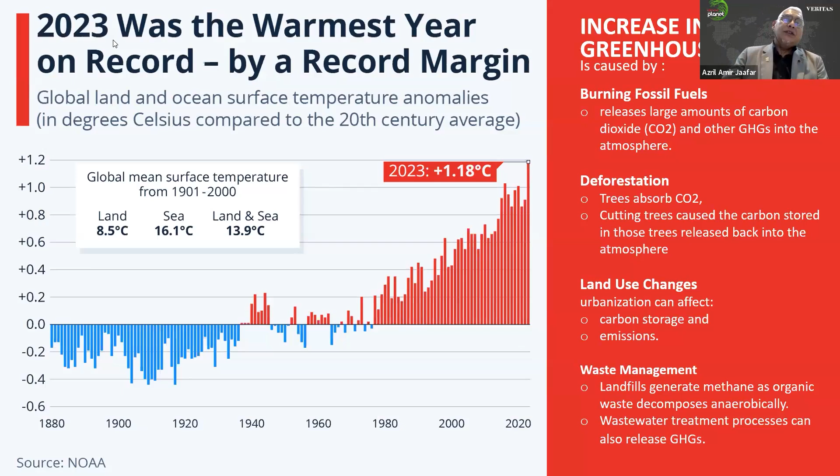And we architects actually are one of the reasons for global warming. 40% of the carbon emission in the world is actually caused by the building industry, and it is from new construction as well as building operations.

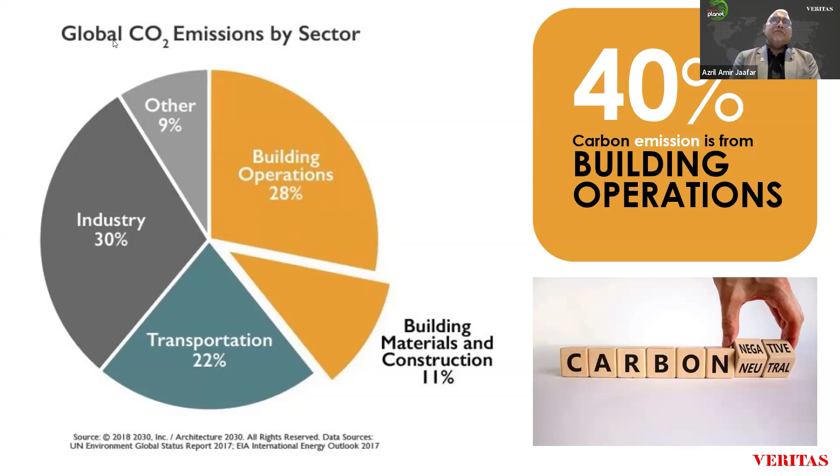And when you look at other parts affected by our doing as well, the transportation - because we indirectly cause the urban design that affects transportation - transportation causes another 22%.

What sort of strategies can we as architects adopt? This is some of the ideas I would like to share that are being used in our practice, but mainly the ideas are for tropical countries. As you know, we are practicing in Malaysia mainly, and most of our projects are in Malaysia.

The issue with tropical countries like Malaysia is how to cool the building, and air conditioning takes about 56% of the energy usage in building operation. So in designing the building, we have to adopt strategies: first, we have to create energy efficient design through various measures as listed here, and at the same time, the building must be able to generate its own energy through various measures of renewable energy.

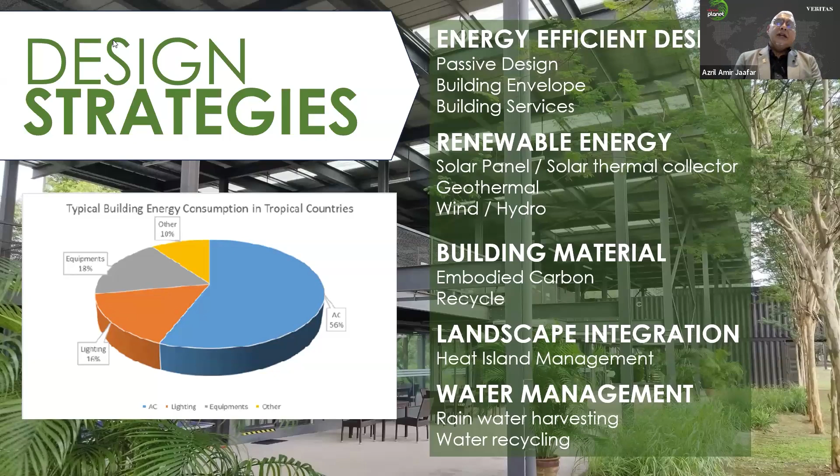And the material used for construction must be looked into from the aspect of embodied carbon and recyclability. Of course, you can't design a building in isolation. You have to integrate and optimize it, trying to capitalize on the surrounding landscape and how you integrate with it. Last but not least, water management is one of the resources that affects building operation. Let's go into examples of our project.

The first example focuses on how we reduce the heat island effect in the city caused by building design. The project is in Shah Alam, one of the cities in Malaysia. It is the headquarters of one of the property developers in Malaysia, and we call it Laman PKNS.

Laman in Malay means a compound, part of the surrounding of the buildings. The building is seen as an extension of the park because it is located next to a public park.

This is a bit of context of the building. As I mentioned, it is in the city, but the city has a large public park, and it is at the periphery of the central business district and the park. So how can buildings facilitate this? The big challenge is how the building can facilitate the integration.

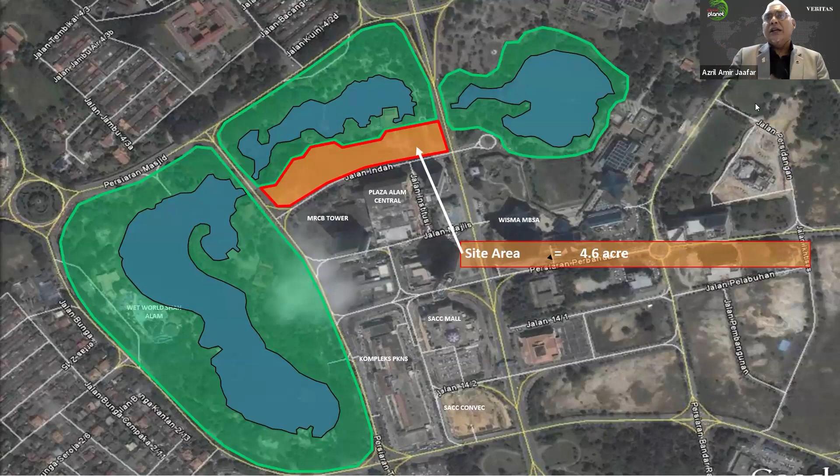These are the concepts we adopt: facilitation of connection from the city to the park, connecting and facilitating connection among the people, the users of the building, and more importantly, connecting with nature.

First, as I mentioned in the strategies earlier, it's about passive design strategy. We look at orientation, and in the tropical equatorial location where this building is situated, we have the north and south facade. The long facade of the building must avoid east and west.

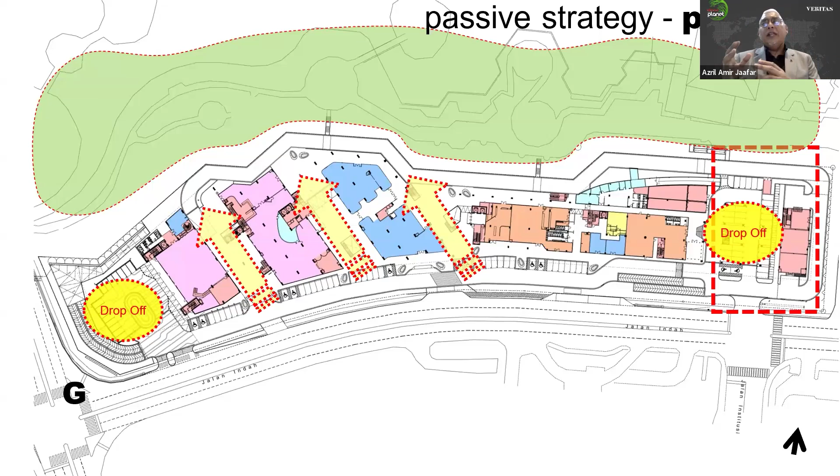So in this orientation, the long facade faces north and south. Then there's the planning - how do you reduce the air conditioning space? The concept we use is to only air-condition the working spaces, the offices, whereas the circulation spaces are left naturally ventilated.

This is an example of that. And then vertically, in the section of the building, we arrange the spaces inside to help insulate the building itself.

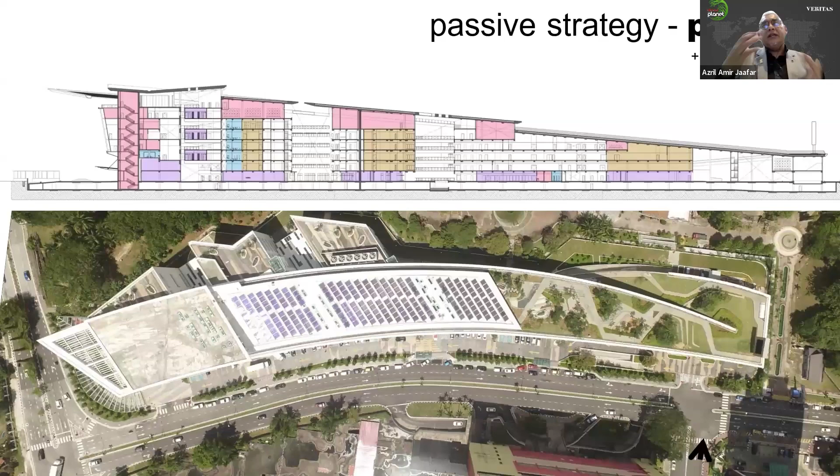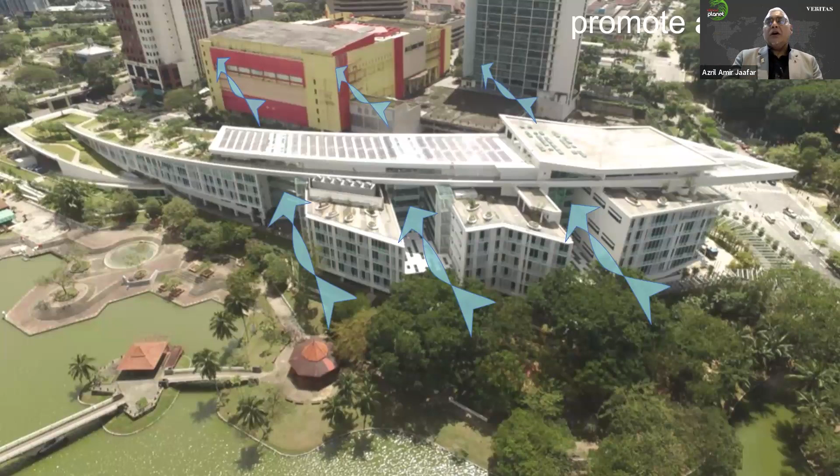The building is kind of a large block, but in order to increase the energy performance and passive cooling of the building, we break it into 4 blocks that allow air to flow in between them, creating a wind tunnel effect that passively cools the building.

This is how the building looks from the street. The spaces between the blocks create a nice shaded external environment that can be used for many purposes - this is the idea of flexibility and adaptability of spaces, which will be demanded more in the future.

This is the western facade, where we use a large overhang to shade the building, which at the same time becomes a feature of the building.

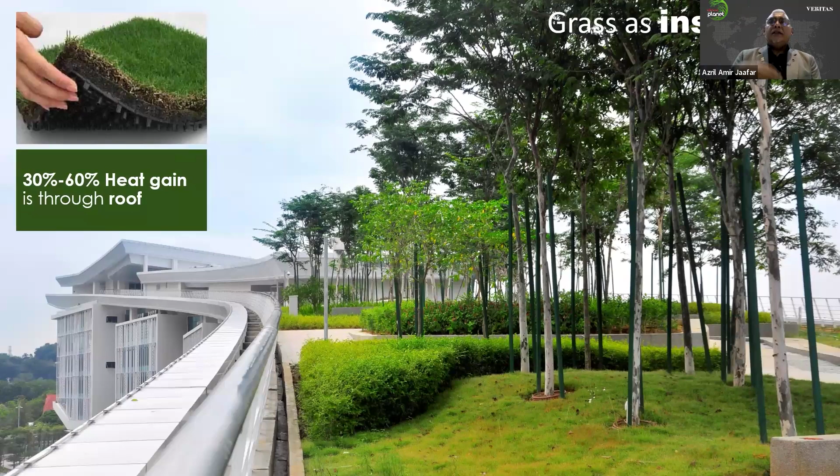The big idea of the building is reducing the heat island effect, and we use landscape, the roof garden, as the main feature that insulates the building from the roof. Of course, we also need a high performance facade and envelope to minimize heat transmission from the surroundings.

We also considered lighting strategy and natural ventilation features in various spaces. Another important element is renewable energy features. This building was designed in 2009, when photovoltaic technology was fairly expensive and solar panels were not as good as nowadays.

So we adopted a renewable measure using the heat tube. In simple terms, we harvest the heat to run the air conditioning system - this is one form of renewable energy we adopted in this building.

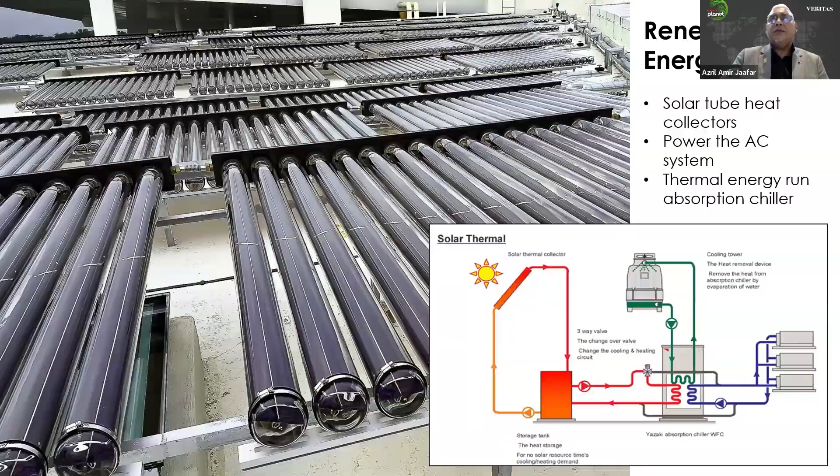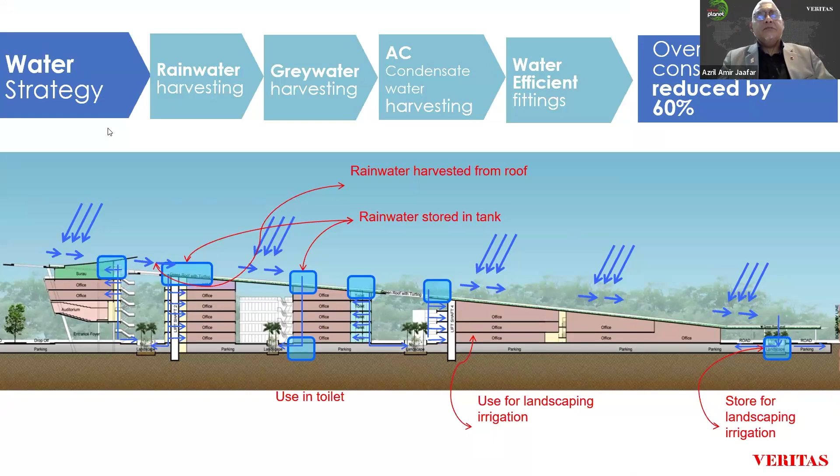Regarding water, various water saving measures were adopted, including rainwater harvesting and other features along the way. Overall, consumption of water from the public main was reduced by 60%, and the building offsets about 5,000 tons of CO2.

These are the verticals we normally use to measure building consumption, or to check the elements that will cause or reduce energy consumption in our design.

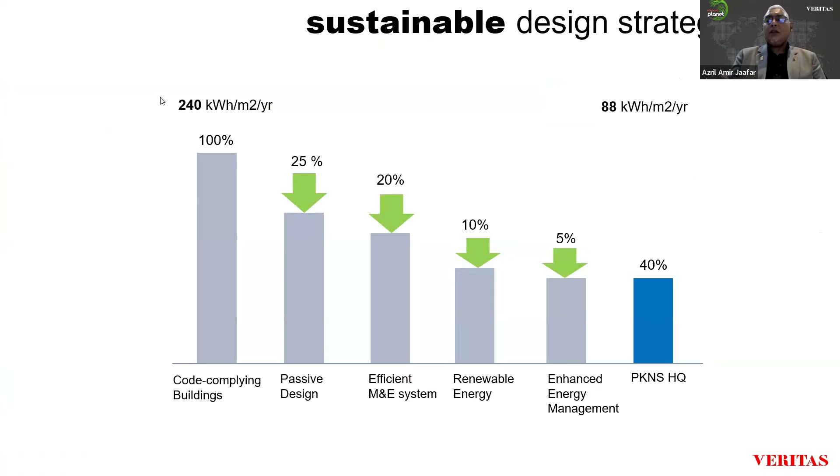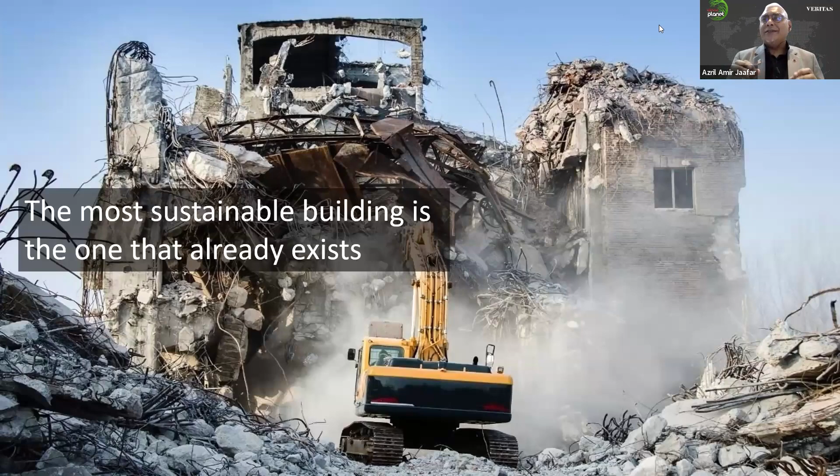Okay, the next project that I will show is centered around the recycling of buildings. This is another one of my favorite quotes: the most sustainable building is the one that already exists. Try to save the building as much as possible without destroying it, because once you destroy the building, more CO2 will be released to the environment.

Another aspect is the urban design, the historical and contextual aspect of the city. So when you recycle, we preserve the history, the memory, and the identity of a place, and at the same time, of course, minimize the carbon emission.

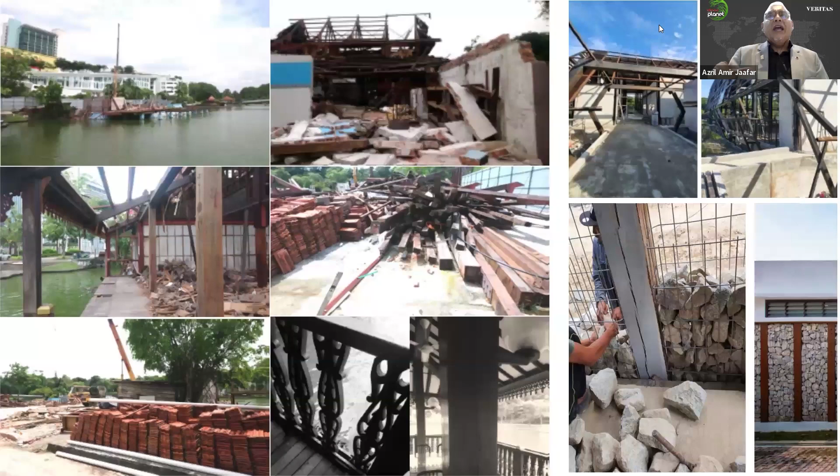It is a floating restaurant, a very small building, again in Shah Alam. The problem with the building is it is suffering from lack of maintenance. The building is dilapidated, left to rot, and because of that it was in danger of being demolished. What we did is we managed to convince the authority, the owner of the building, to maintain it at the same location.

And recycle whenever we can the material being used in the construction of the building. First of all, the foundation of the building is being maintained, and whatever materials we can salvage are being kept and saved, and we remodel the form, reuse it in different usage or configuration or permutation.

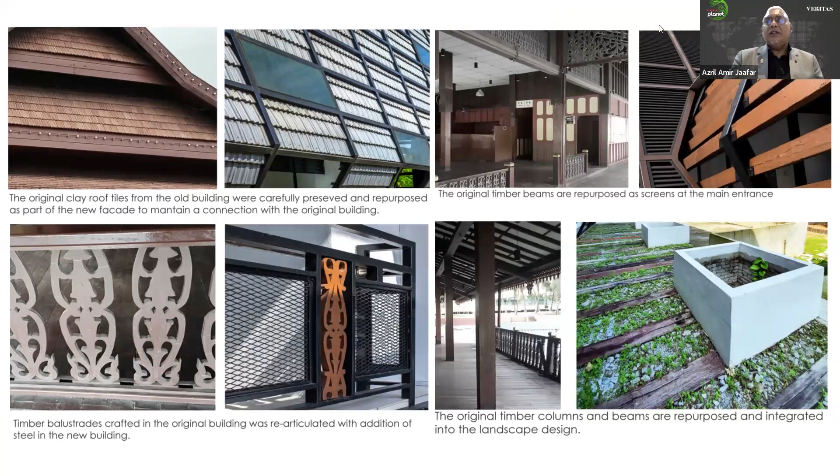So, for example, the roof tiles being converted to the facade of the building, and some of the nice articulation of the craftsmanship being recycled and reused, so that a certain element of culture is being preserved in the building itself. And we reinterpret the identity, the cultural identity.

If you look at the previous building, the form was some version of vernacular Malay architecture. In the new building, we look at another reference of the traditional or local identity itself in a modern form. It is about reinterpretation, about redefining the identity of the location that responds to the climate.

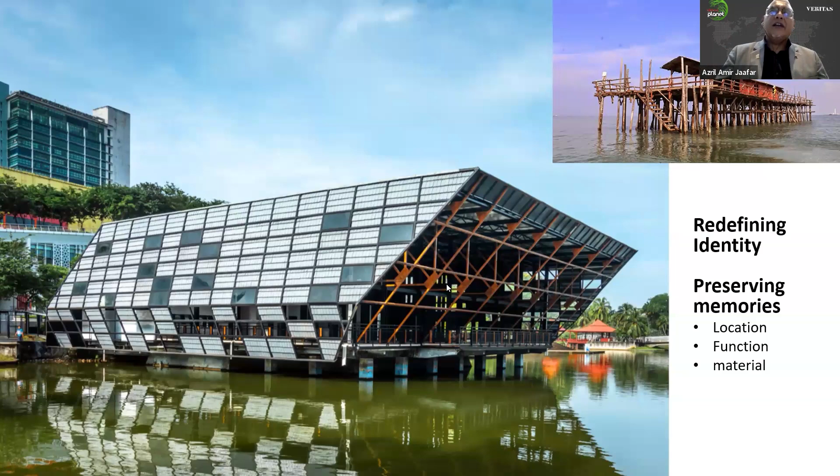Right, hang on, let me try. Okay, the next project is about urban design, slightly about urban design.

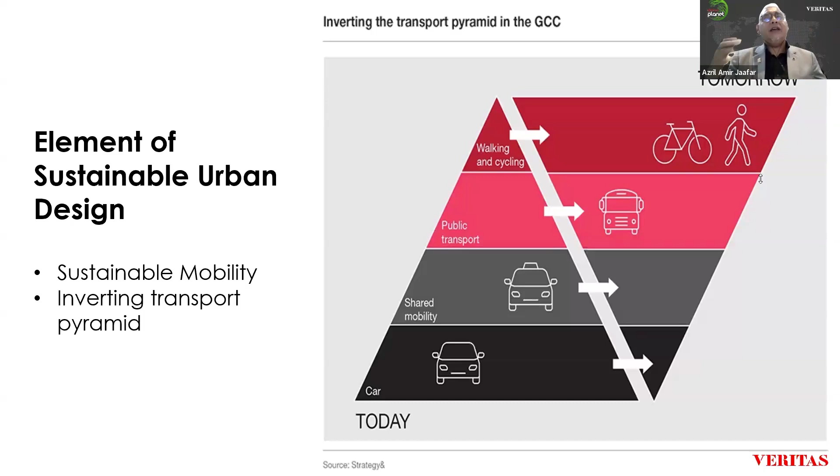The trend in the future that we can't avoid is moving towards sustainable mobility. This diagram is something I got from a Middle East conference, where the objective of mobility in the GCC countries is moving more towards walking and cycling, using public transportation, using shared mobility, as well as reducing private car usage. These are the main directions of urban design in the future as far as sustainable urban mobility is concerned.

The project I'm going to show next is about facilitating the movement of people between two different districts in Kuala Lumpur. If you are familiar with Kuala Lumpur, there is one district that has a very distinct skyline, the Kuala Lumpur City Center, and across the river there's another really undeveloped part of the city. There's a lot of history, but I won't dwell on the historical part in this presentation.

But basically, for today's topic this is about facilitating urban mobility, about encouraging people to walk in the hot tropical climate, and at the same time providing equal opportunity for development as well as addressing the historical part of the project.

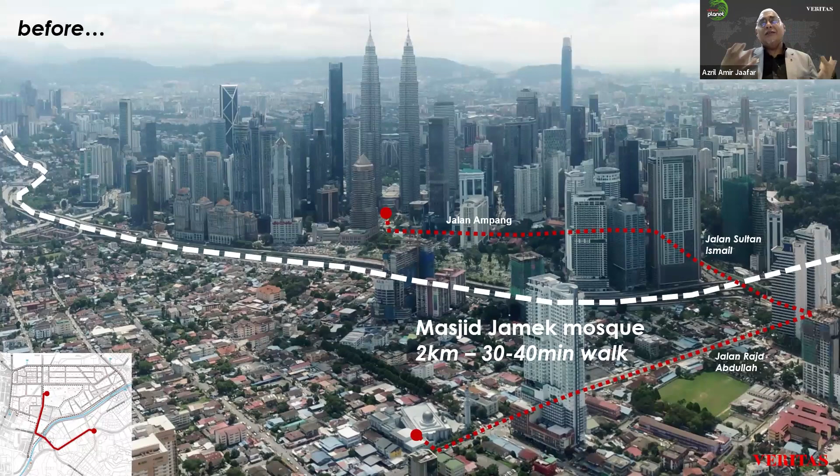A bit of the issue here is that highways disconnect the two parts of the city. Because the highway was constructed dissecting this part of the city, walking became impossible. The bridge that used to be there is no longer there. In order to go to the other side of the city on foot, it would take about 40 minutes in the hot tropical climate, so people definitely won't walk in that kind of situation. But with the bridge, the total distance or time for walking is reduced to 15 minutes.

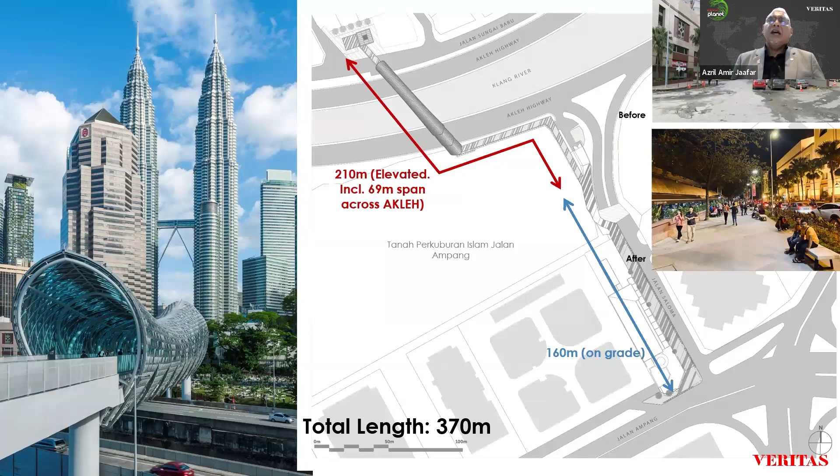When we develop the design, because it has to be an attraction in the city, we look at the elements of culture, the elements of environment, and at the same time the elements of celebration.

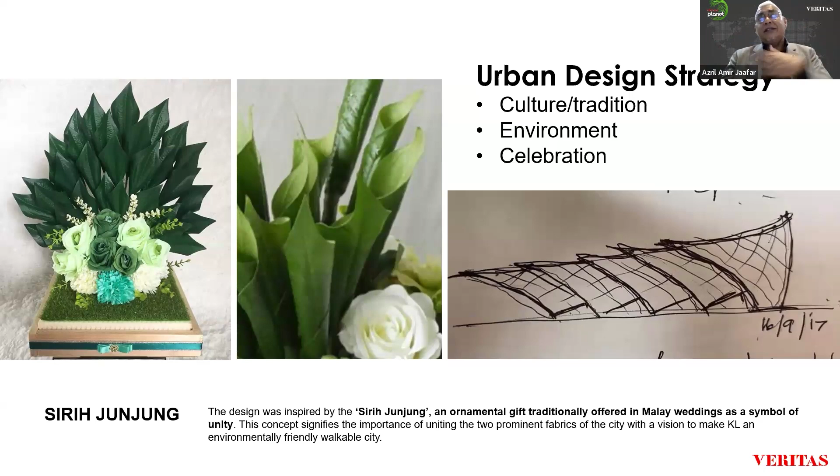And because of that kind of attraction, people are encouraged to walk. And this is one way of encouraging urban mobility, sustainable urban mobility in the city of Kuala Lumpur.

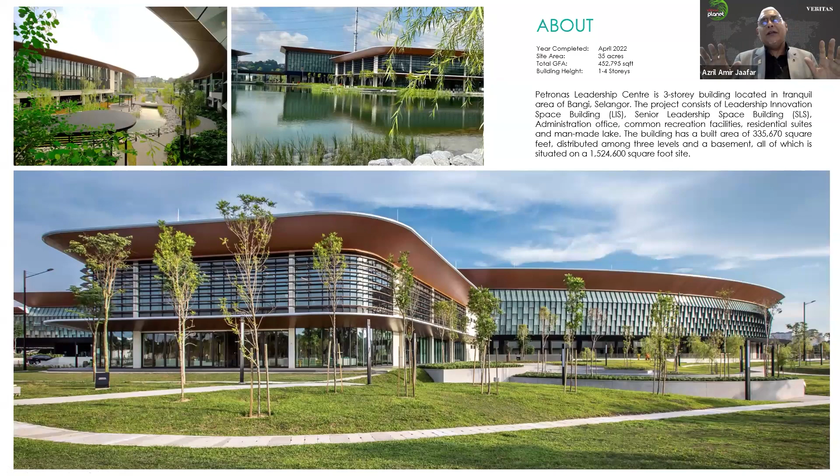The project is on a 35-acre site, and as you can see, this is a sprawling building. So our adoption of the project is slightly different, and the project is looking at the future of learning. So the elements of flexibility and innovative technology are married and integrated in the overall design, but at the same time the method of interaction and learning is through dialogue, interaction, collaboration. This is the challenge: how architects can foster all this effect through spatial design.

And the most important part is how we incorporate environmental design into the project. So we set the objective of having zero energy consumption, zero waste, as well as minimal potable water usage. These were the objectives we set at the very beginning of the project.

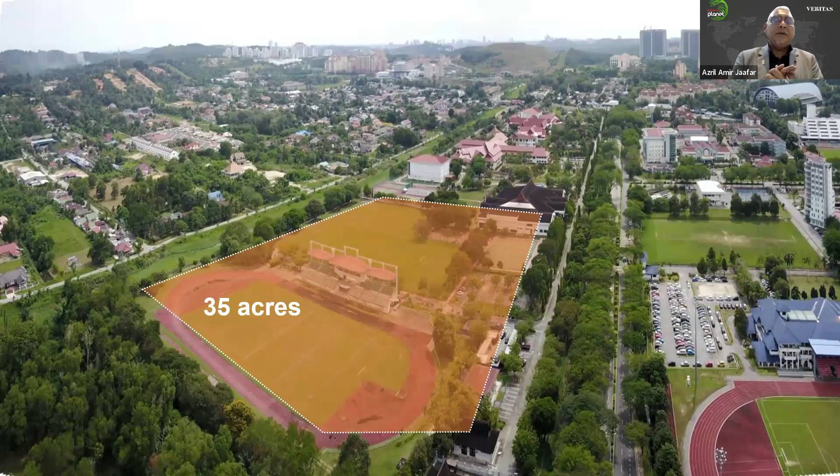As I mentioned, the site is 35 acres, and it had been touched before, developed as a sports complex, then abandoned and not used because of safety issues and lack of maintenance again. So what we did here...

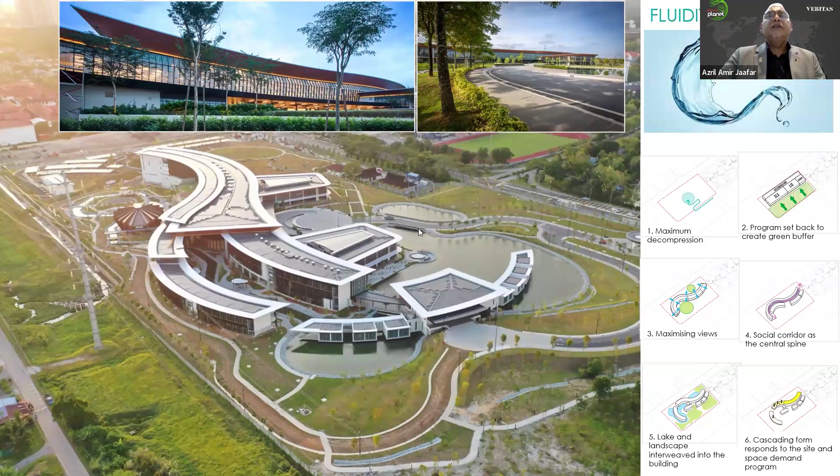First of all, the concept of fluidity creates the form of the building, and there's some environmental advantage as well. Because of the sprawling site, we looked at vernacular architecture and vernacular urban design, the village design actually, to see how we could use the surroundings to create a conducive microclimate that lowers the temperature around the building. Because once the temperature is lowered, the effort to cool the building is less. So this is the approach for this project.

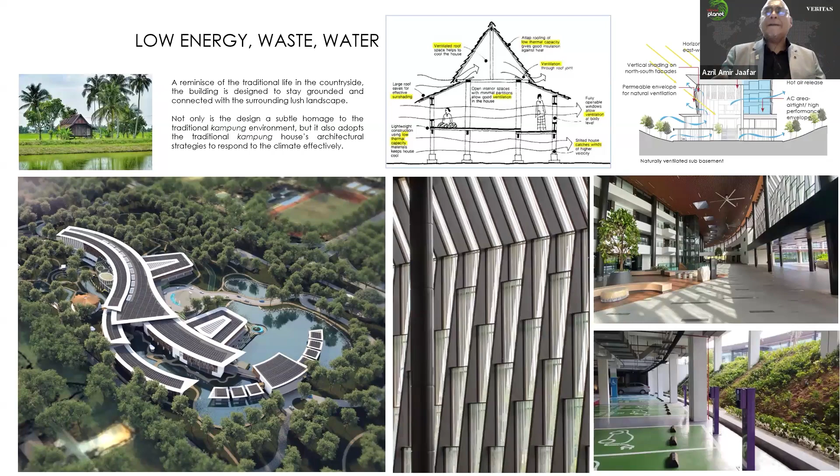And again, the same concept of orientation and the various ways of locating materials and spaces inside the building, as well as integration of naturally ventilated spaces in the large complex, is being adopted here.

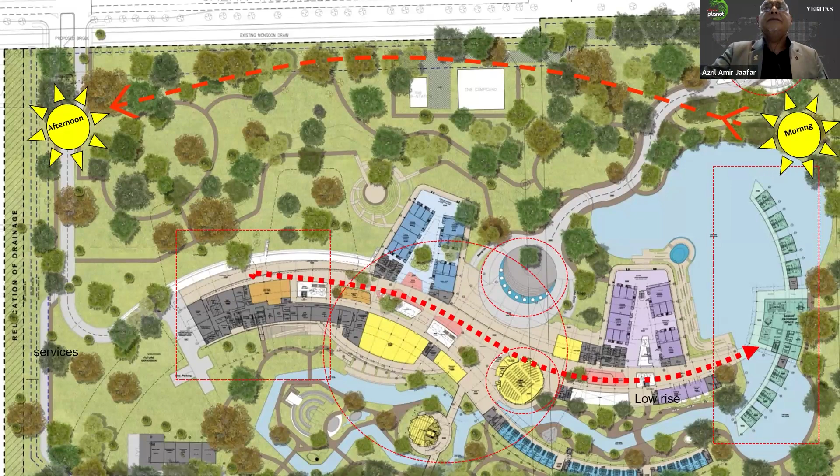And the elements of flexibility, because flexibility is one of the features of future spaces, so the classrooms and teaching spaces are designed so they can be adapted into various forms, from a 10-pax module to a 30-pax module, to 20, to 60, and even 120, through various configurations using architectural elements.

One of the features of the building is the multi-purpose hall, which is, first of all, round, and at the same time integrated with technology. The idea is for the space to give the experience of being at another location. So this room is fitted with LED panels surrounding it, so that the whole experience is really immersive inside the space.

At the same time, one feature here is that the LED panels surrounding this space on the wall are made of rotatable panels. So at the end of every event, each of the panels can be rotated so that you are transported back, or reminded, of your actual context, the current location of the building.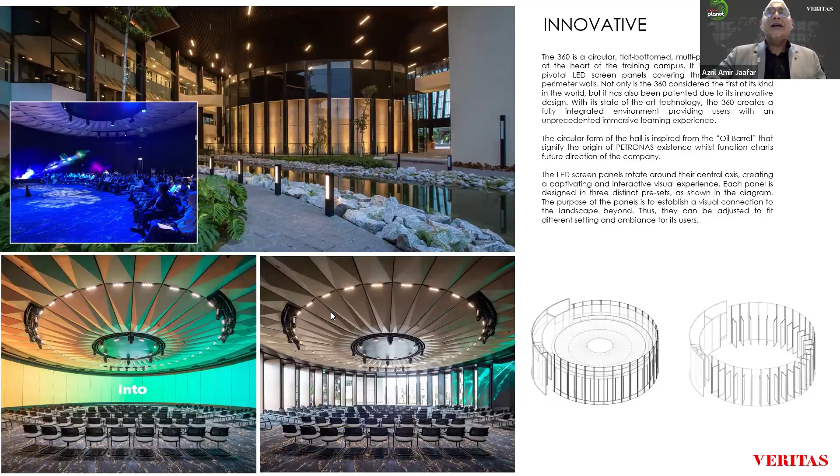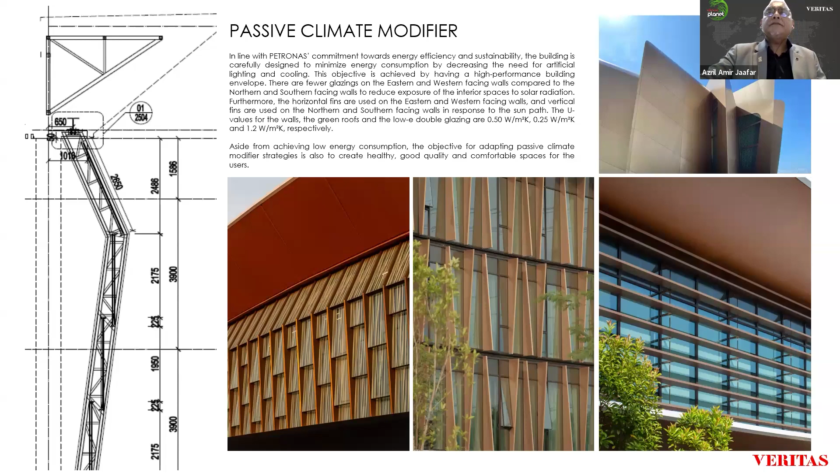How do we adopt various elements on the facade to create high performance as far as heat transmission is concerned? Our method is simple: on the east and west facade, we adopt horizontal elements, modulated to make them more interesting. The north and south facade adopt vertical elements, as well as certain facades where you need particular experiences inside the interior space, so we adopt higher elements that create diffuse light in the space.

These are some of the numbers we achieve, and the elements of being in the environment, or surrounded by environment. The notion of blurring the boundaries between internal and external means the space becomes more flexible, evergreen, and can be left for users to experience and become creative in how they use the spaces.

By integrating the design with the surrounding, you encourage biodiversity. There are a lot of animals around the buildings that suddenly appear and become part of the environment. If you remember, the site previously was just a sports field.

The objective is to imitate nature, and by imitating nature, the whole cycle of the natural environment is created, thus the carbon release or global warming effect of the building and surrounding being reduced.

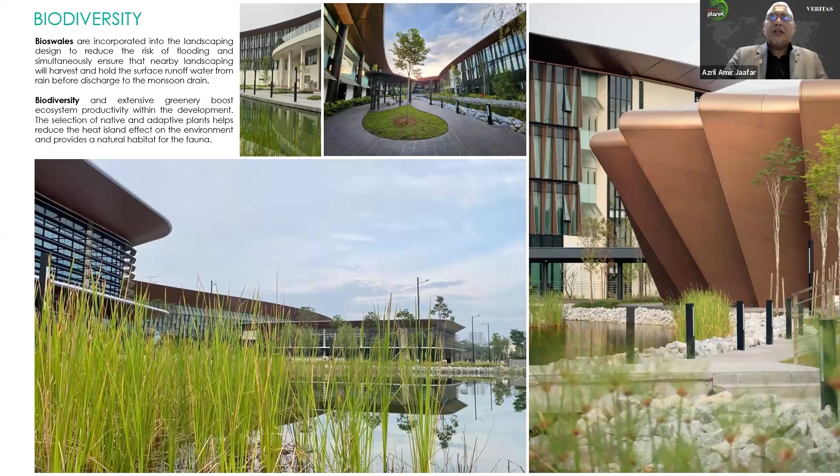So various experiences, and then the client or user fully adopt the notion of being in a sustainable design environment into their lifestyle or facilities.

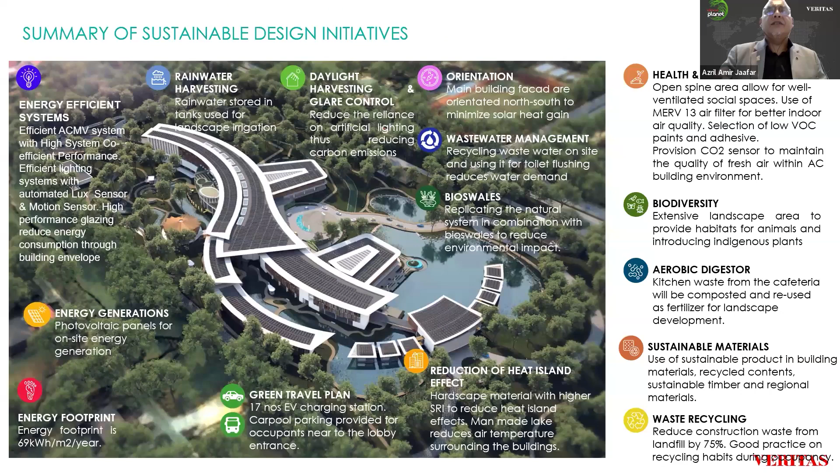These are various initiatives that we integrated into the scheme, and because of that, the project managed to reduce electricity use by 65% compared with other similar buildings and facilities in this area, and water consumption by 89%.

I think we are coming to the end of my presentation. For me, this is about advocacy - sustainable design is not an option given the current state of the environment, it is our responsibility. Thank you very much for listening.

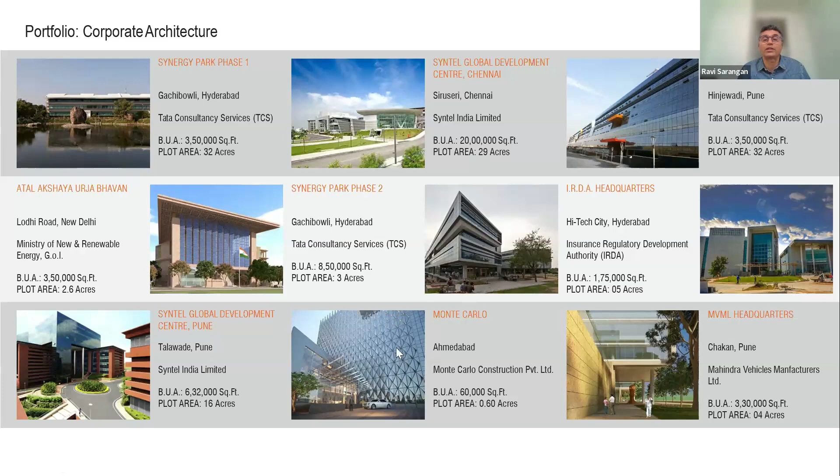I think we're going to spell out the measures we take across all our projects. I'll give you some case studies. The rest of the projects on this page, like Mahindra vehicles, Tata Consultancy Services, or Monte Carlo, we've been taking measures to ensure we consume as little energy as possible, and many of them are close to net zero.

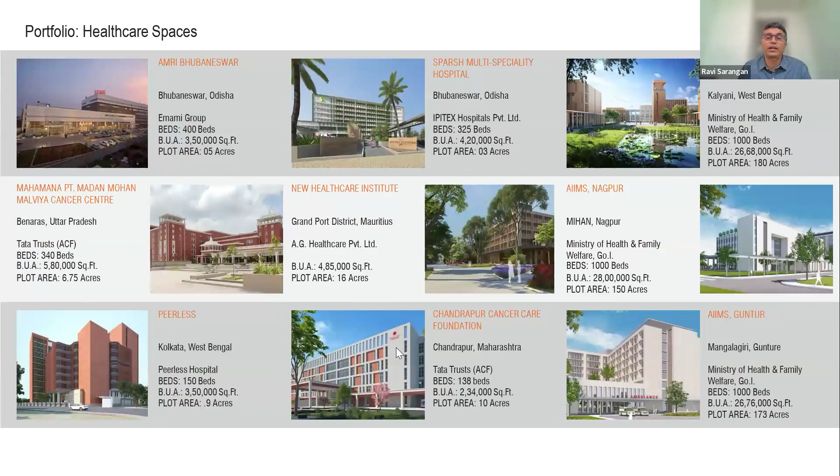I'm going to rush through some of the other verticals. I don't want to take too much of your time because I want to spend more time on what I'm going to showcase in terms of reimagining spaces. As I said, we leave behind a large impact by the square footage that we build. I'm going to showcase one project to you, which is the ICICI Prudential Life Insurance corporate office at Prabhadevi, Mumbai.

This was a close competition which we won, and I think there were about 6 odd architects who were invited. This site is near Century Bazaar, Azril. This is South Mumbai, maybe close to South Central Mumbai, very close to the waterfront, but you can't see the water from this space, and that gives you a radius.

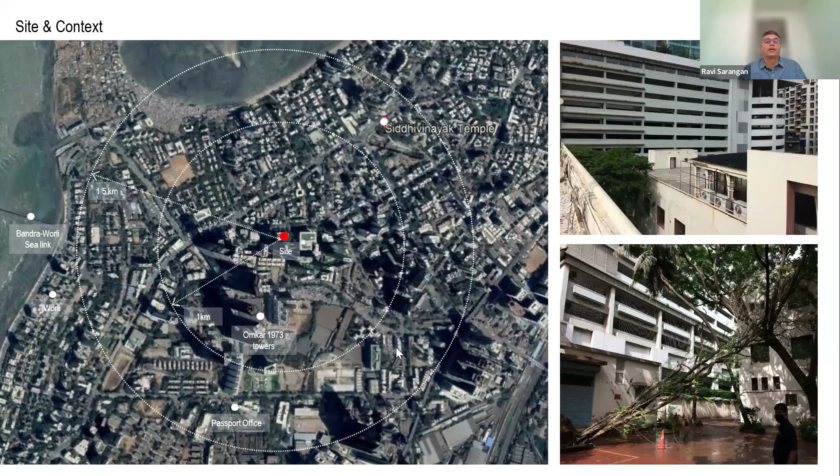The red dot is my site, surrounded by some buildings on the side. The strengths of the site were it was on a prominent road, one of the most prominent roads, so ICICI Prudential would get great branding. And from the upper floors, you could get a potential sea view.

The weakness was they were on the south, which in fact was a boon as well because it was protecting against heat ingress, as there was a very tall building to the south. Opportunities were plenty; we wanted to give ICICI Prudential a great branding opportunity as well as the possibility of incorporating energy efficient measures. Then finally, threats were traffic, pollution, air as well as noise.

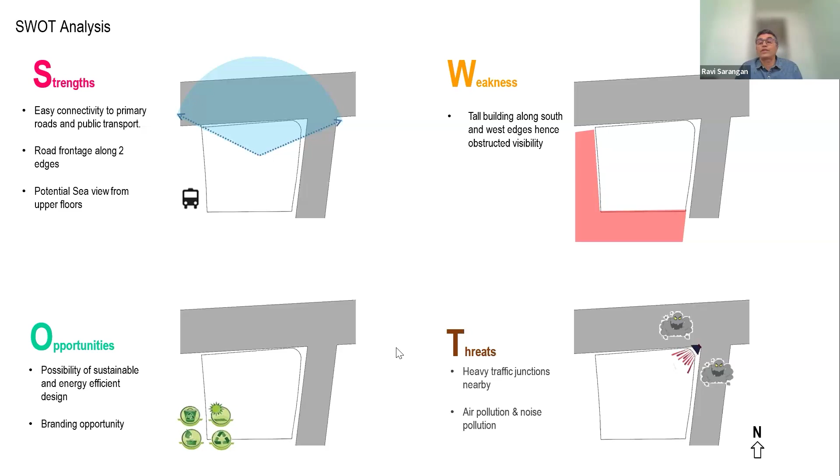But luckily, most of my site was facing the north, and the view was also great on the north. Quick look at the existing site conditions: there was a building existing there, with lots of trees on the periphery. That's the kind of vegetation, and that's the kind of existing building.

Then we came up with initial schemes. We did the usual study of the bylaws, did climatology studies, and then we hand drew a few sketches. We decided what could leave behind a good impact, both aesthetically, functionally, as well as a brand opportunity for ICICI Prudential, which is into life insurance and has one of the larger market shares in the life insurance as well as non-life insurance space.

So what we gave them, as Azril also mentioned, was minimum columns so that you get flexibility and future-proofing of the building, and the site geometry as well as orientation because of the southern tall structure and the north-facing front meant we wanted to take in as much natural light as possible. What we did differently was think about how we could mimic the trees on the ground plane onto the vertical plane, and therefore we came up with several schemes.

This being the one which was approved, this was kind of a great statement that we were making. A high-rise bang on Century Bazaar Road, which is Senapati Bapat Marg. Immediately you saw that this was different. It had terraces, double height volumes, triple height volumes, and at ground level, this was creating some sort of a statement out there. And we were all very thrilled.

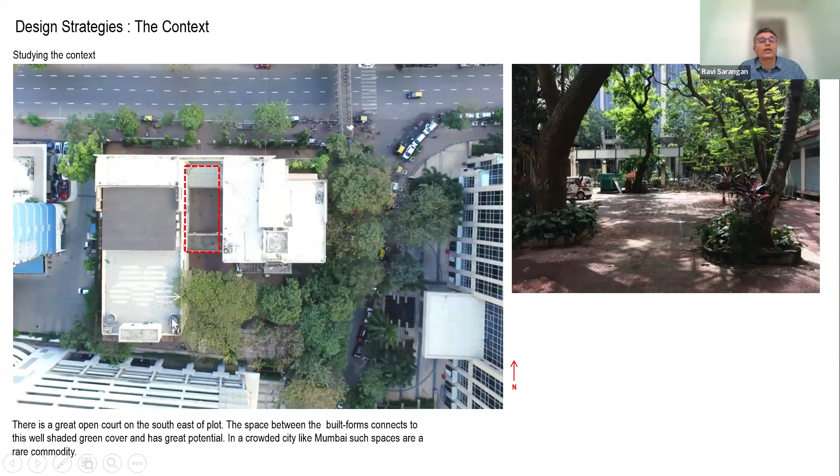This was the site, curved along this corner, and you saw that swanky tower we had proposed. Then we started looking at hand-drawn sketches and asked how we could plan the 2 buildings, introduce a new green lung, and took structural advice because this was a 40-year-old building that had some modern architectural elements.

Then we said, okay, here's what we should be doing. We should add maybe a structure to take care of parking, because once you repurpose a building, you have to adhere to the new bylaws and statutory norms. Luckily for us, there was an entrance on the front road as well as the eastern road, so we said we could use a parking tower.

On the southern side there was a huge building, so there were no great views to the south. We put up a large parking tower to match, and that's where architecture comes in - you need to be conscious of where you're building and how your neighbors will perceive it. It's not just your own property or project; you should look at the surroundings, the environs. Luckily, there was a parking structure in the rear which was 7 floors tall, so we made our parking structure 7 floors tall too.

And then we said this heart that we've indicated could be an open atrium or a closed atrium between the 2 towers, which kind of makes the place humane, livable. And then we studied the 2 buildings.

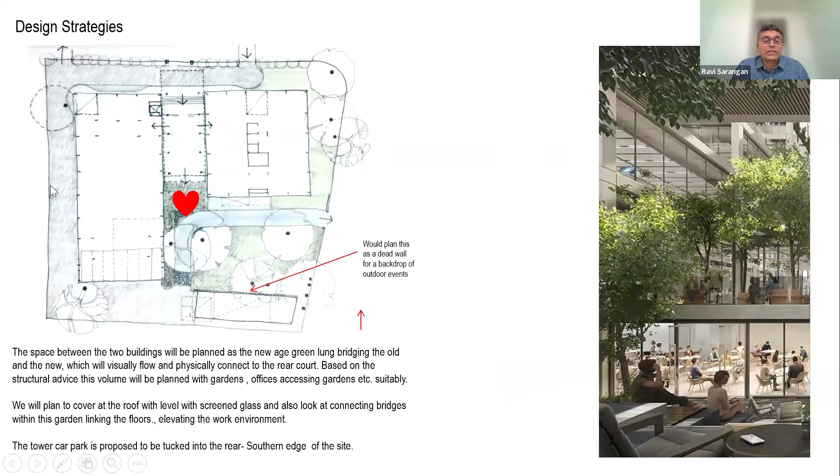Obviously, these 2 buildings were built in different times, so that's another challenge we had to face. One building, which was newer, was 4.5 meters tall. The other building, which was older, was about 3.6 meters tall. We had to take care of that.

So what we did was we created this atrium, built bridges which joined the 2 floors, and they acted as communal spaces, places for collaboration. We started doing some SketchUp models, and we drew a section along this line. And then what did we do?

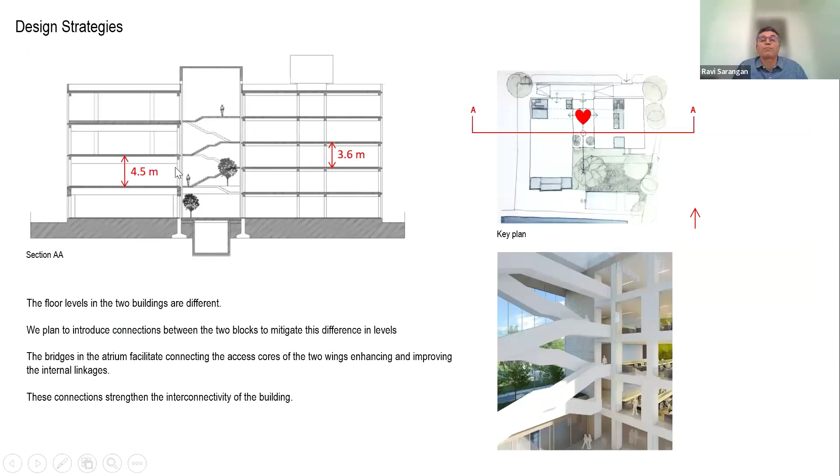We said let's do something on the roof. When I do this closing of the roof, I didn't want to close it fully. So instead of putting a flat roof, we thought why don't we get in some amount of north light which filters into the space. That means the people sitting within this floor plate on this side and this side also get light from the top. That's what we attempted to do, and that was a north-light arrangement.

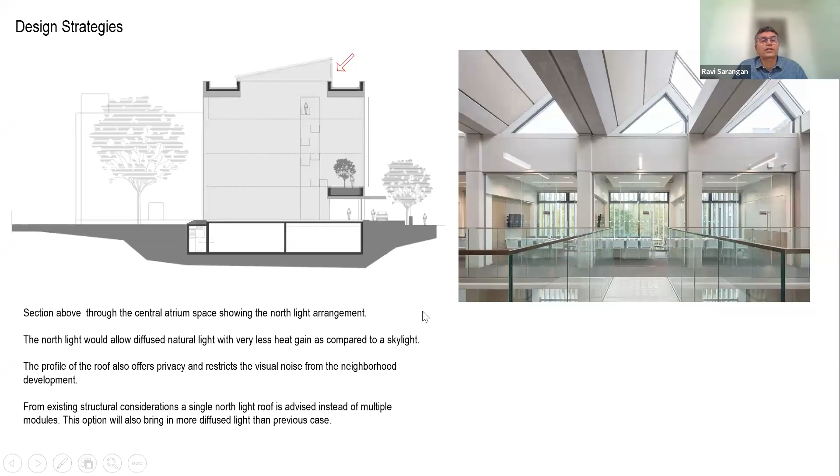And for the existing structure, since this was an old building, we had to do a lot of jacketing on the columns, a lot of waterproofing works, and a lot of study on the existing basement. And then we came up with plans.

So we started doing the layouts. This rear block, shown as a utility block, later on had a tower car park over it. We were blessed with a lawn on the rear side, which was a mandatory green area, and this was a wonderful tree.

Then this building, which was built more recently, had an auditorium on the ground level, and this was an office block. The atrium came in between, and we introduced a large reception area, taking it right up to the 4 floors that the building is listed, with a porte cochere where the security happened.

We did some interventions in the form of introducing an elevator, some amount of core cuts, and enhanced the size of the toilets.

Then you had a blown up version of the ground level, where we typically take all the visitor areas on the lowermost levels. The cafeteria had external staff coming in who served prepared food, but we still needed to give them some area for a kitchen for preparation of snacks.

We had a gym, and then this auditorium, which was a flexible space, very similar to what Azril was mentioning, giving them various options. It could be a training space or an auditorium space. Then we had a nice large reception and 3 meeting rooms, which served as a business center.

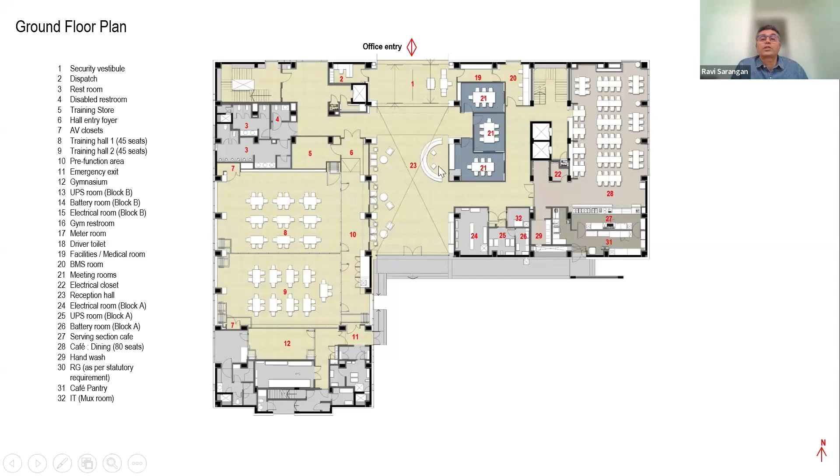So immediately you see this hall arrangement, and you could have many more people sit, and you could have a stage, because this was 4.5, I think more than about 4.5 meters. That was the office entry.

And then you would take a left, take the staircase or the elevator to go up, or you could come to the cafeteria. And then the typical floors happen above it.

There was a desire from the client to have 120-degree organic workstations. What it did was take in some amount of eastern light. Luckily for us, the western light was blocked by the atrium. On this side, we played with the fenestration and gave it lesser fenestration so we didn't have too much ingress of western light. The south was blocked by the core and the meeting rooms.

We did some surgery to the existing toilets. So a lot of effort went in. When you do adaptive reuse projects, it's not just you—it's got to be a joint effort with the architect, the structural engineer, the mechanical engineer, everybody coming in and contributing.

Then there was a second floor, and the second floor also was primarily open office. As per Vastu, you would typically place your head honcho cabins on the southern side of the building, and then some amount of cabins came on the north, so even the workstations got ample natural light.

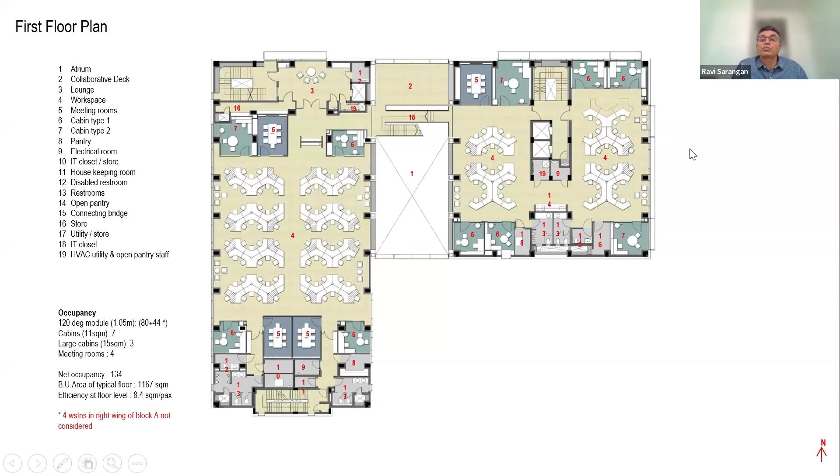Typically, on an open office floor plate, we would not give cabins the external side—by cabins I mean the enclosed spaces. But here, since the floor plate was small, we had an opportunity to give them external windows, and the open office still got sufficient natural light. That was the second floor plan. Then we had the topmost level, on block A, where we had one more level.

If you remember, this was 4.5 meters, a taller structure. The third floor was where the executive sat. On the executive level, we had the managing director, the chairman with an external terrace, and a large boardroom.

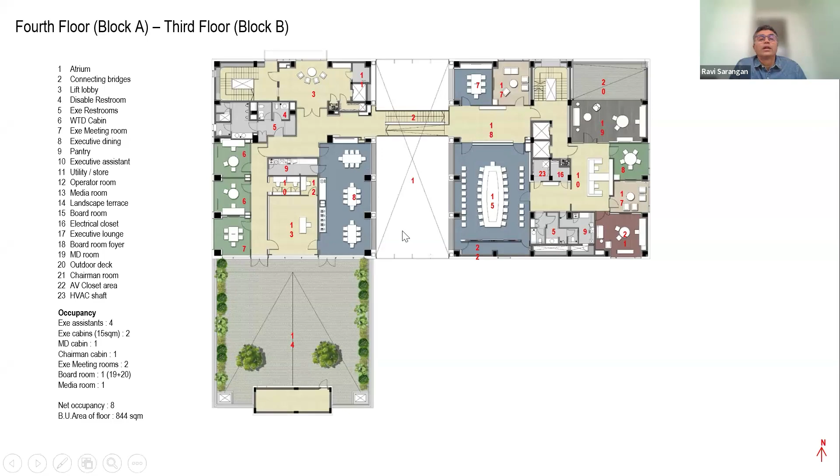With a lot of internal interventions, we converted this into a great corporate headquarters. That was the image we got into place - that's your managing director's cabin, open office. When we chose materials, we're firm believers that we try to source almost all materials within a 500-kilometer radius. So we chose this lighter granite stone, which came from Madurai.

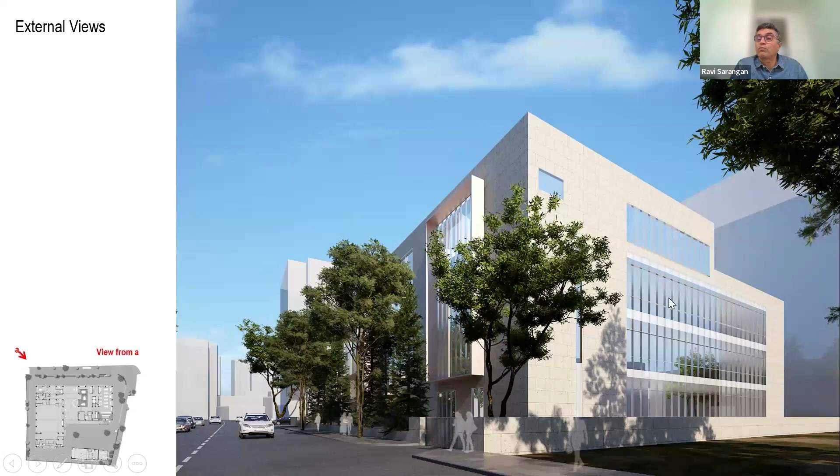The rest of the fenestration went in for double glaze. Since this was a northern facade, we went in for sufficient glazing. The atrium was also glazed. As we got onto the western side, you'll find the window wall ratio changing - less windows, more wall. Then the internal spaces - these were our initial sketch models.

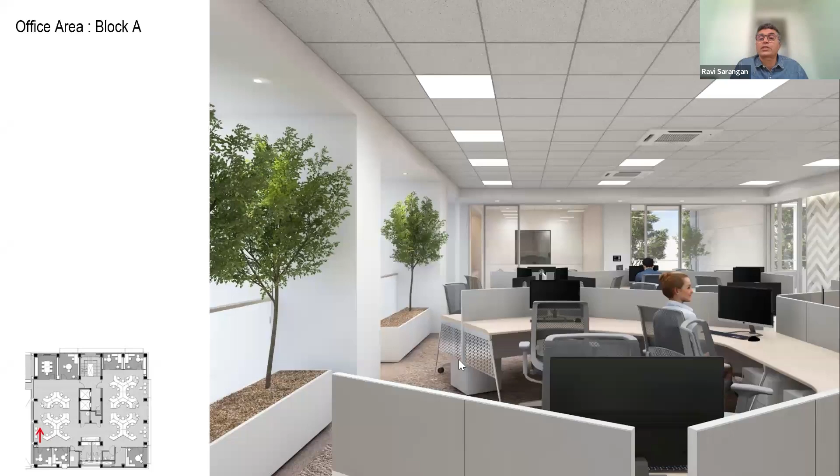To the right was the auditorium I spoke about, and on a clear day you could see the tree as well behind. A typical workspace, with a lot of biophilia elements, natural trees within the workspace. These were simulated images, and what appears now is exactly the same as what you see.

Also, what we do at Edifice is try to involve local artisans. At least on the focal walls, we had Indian marble in two shades, done in herringbone pattern, because high traffic areas we'd like to keep as permanent finish walls, and the rest of the areas were anyway glass with very minimal walls.

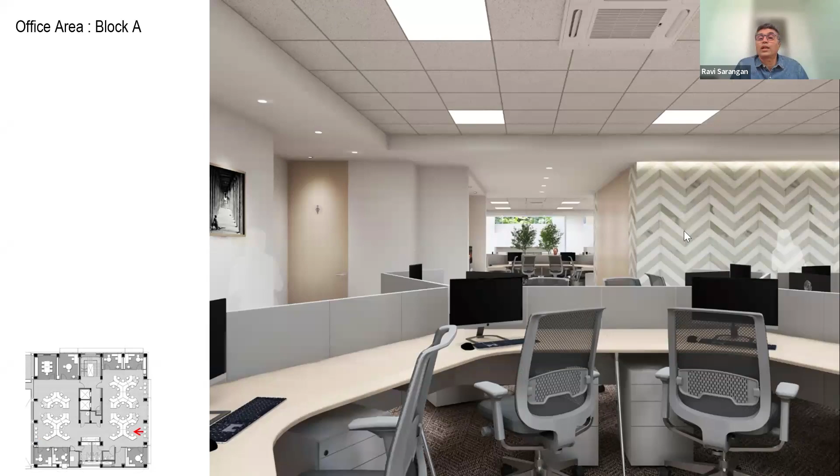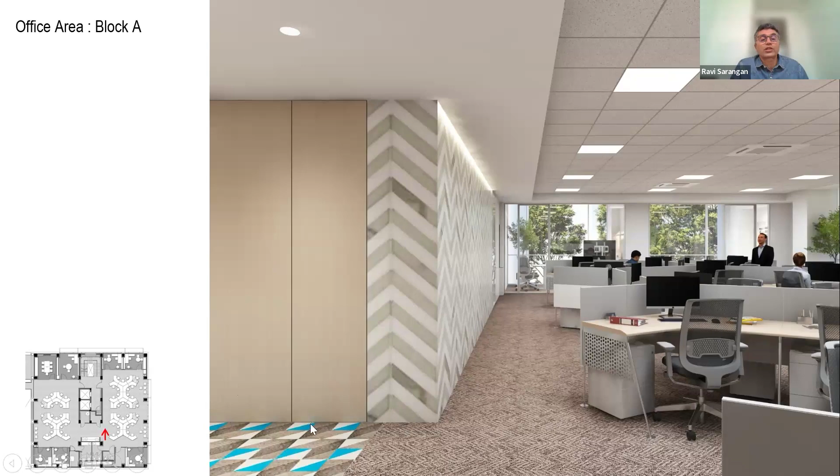So that was the link, and wherever there was a breakout area, we punctuated it with certain elements - there was a pantry counter here, so we went in for some hard flooring in the pantry counter area for zero maintenance.

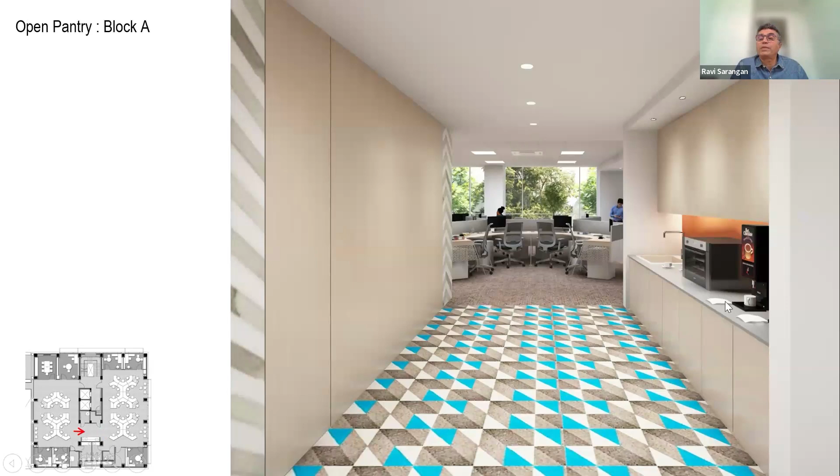Normally our interiors we keep very minimal, devoid of handles, playing with very light tones. That's from one office bay, looking from block B to block A, and that's how through the atrium we could see the other wing.

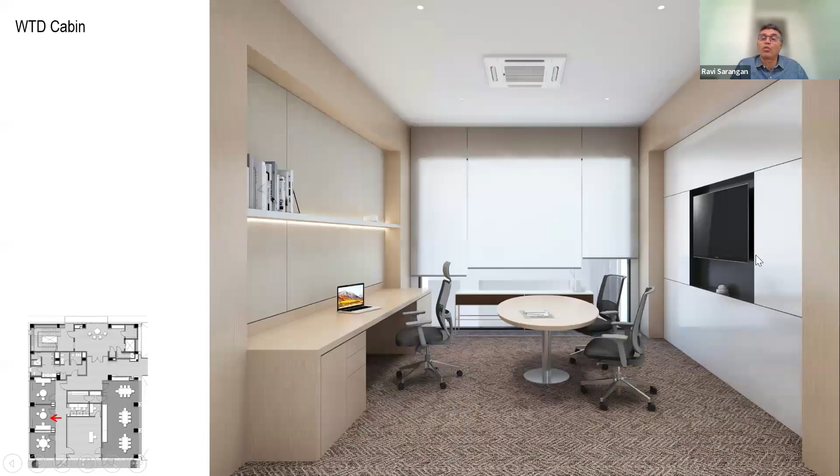Immediately, what was two different offices was combined - a typical office bay was combined. Typically we'd have a cabin where they face the wall and work, and when they want to discuss, they'd use a meeting table. They had a monitor requirement - some desired the monitor on the wall, some had freestanding. But again, very minimal, very tastefully done.

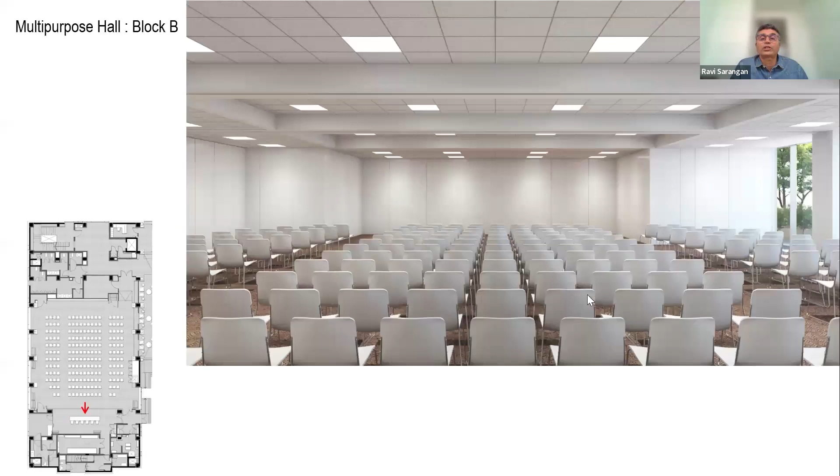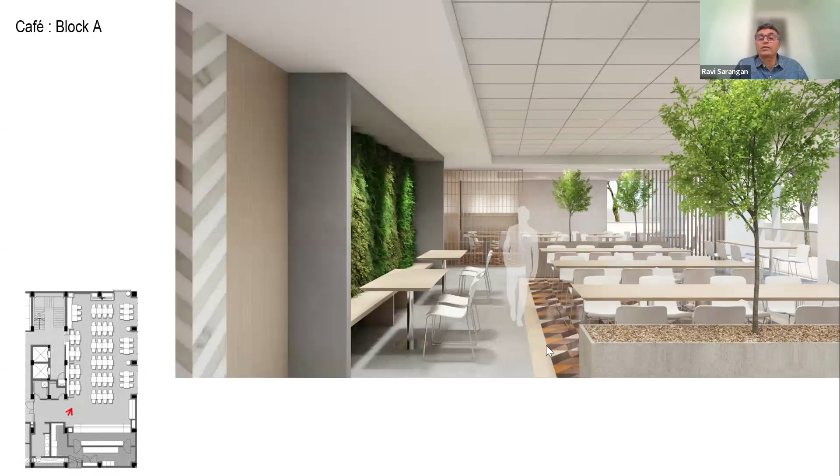Then we came to the training hall in Block B, where that multi-purpose space happened with collapsible partitions - you had the same as an open hall. Then we came to the canteen on the ground floor, where we played with a lot of Indian materials, local stone, a combination of Tandur and Jaisalmer. Again, a lot of biophilia, a lot of greenery around.

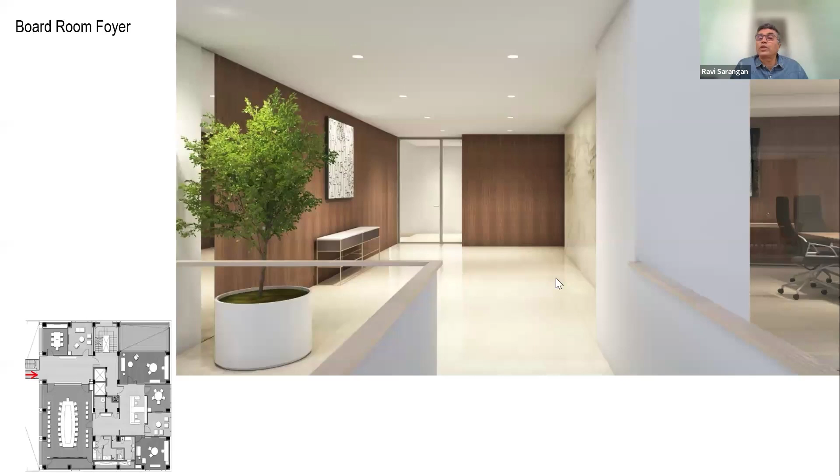As we go on to the uppermost floor, this is probably the only place where we've used a stone from the Middle East - a beige from Muscat. That's probably the only area where we imported something from outside the country. Now, a requirement from ICICI Prudential was that their main mother company, ICICI, required their boardroom to be replicated in all the ICICI companies.

So this is their old style boardroom, including the chairs, the table, and the peripheral chairs. The only modern element infused was the technology, and of course even the artwork was something we could play with.

My advice to all the architects and interior designers is to engage. Design is a dialogue. You engage with your client, you have a dialogue, and you're giving shape to their ideas. You're not pushing design down their throat, right? So it is a result of extensively working with the client.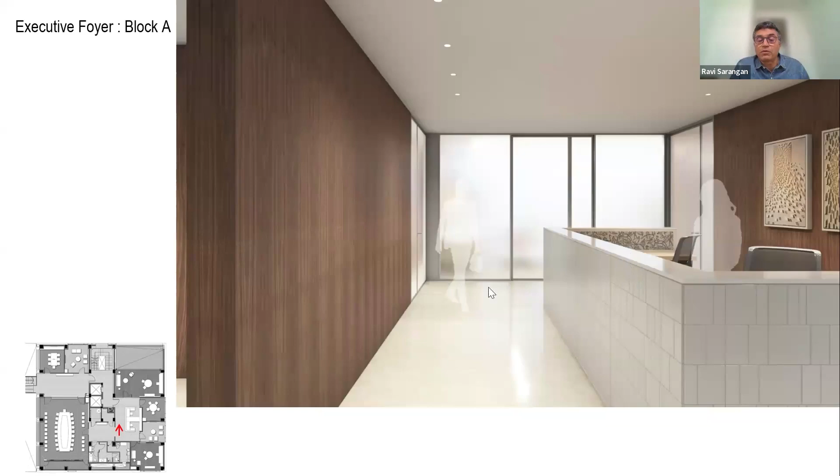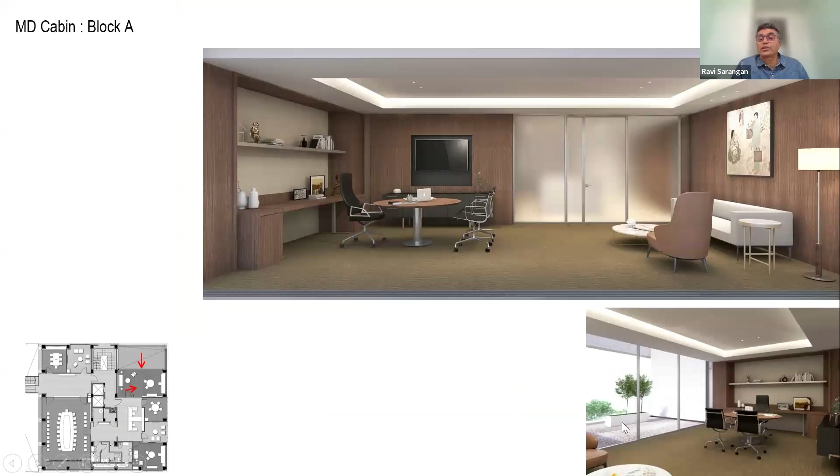So that's your managing director's cabin, where we had some fixed furniture, some meeting furniture, and he had this terrace outside. We had engaged a landscape consultant to help us out. All double glazed partitions, very minimal.

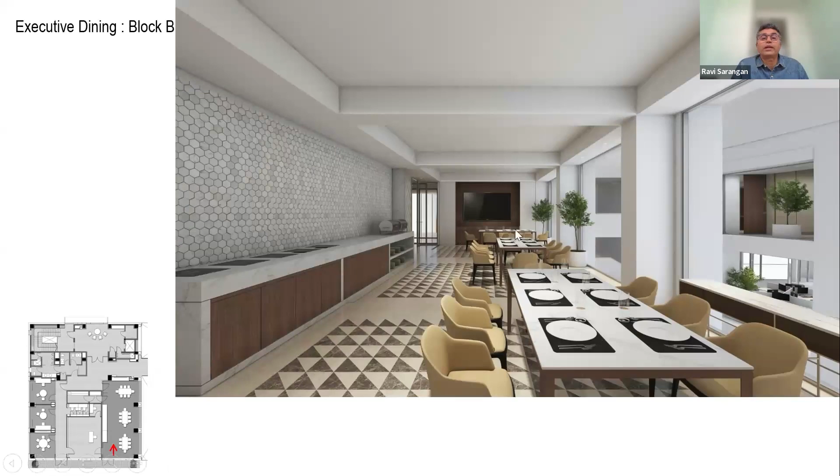And this was the executive dining area, a continuation of the cafeteria. And again, if you see, this is Rajnagar marble in a hexagonal form, and even the tabletops are all Indian white marble, but the flooring again is from Muscat, which is a beige Muscat. A lot of emphasis.

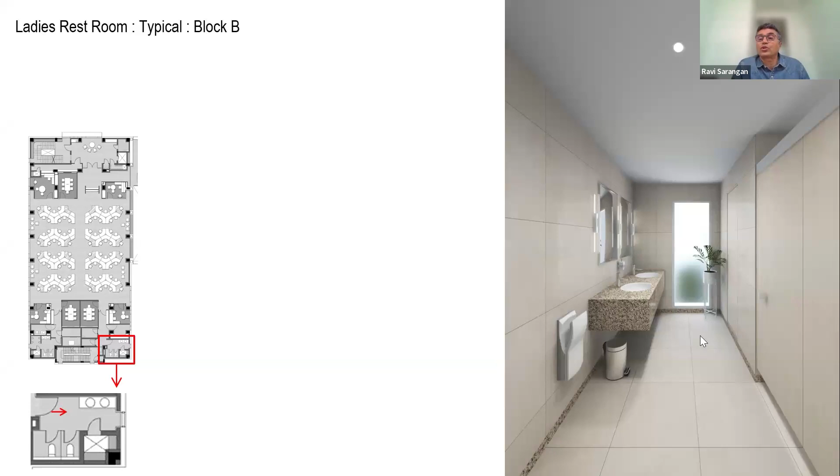The story goes that you can gauge a company by the way they've designed and maintained their toilets. So we are firm believers in making our toilets, even if they are cramped, go in for very light shades, make them maintenance free, and see that they are well ventilated and lit, much against everyone else's approach. Wherever we are designing our own buildings, we ensure there is a large window available for the toilet as well, because you invariably tend to mechanically ventilate, but just try introducing natural light windows to your toilets. It does a remarkable difference in hygiene.

So we went in for an Indian granite and beige vitrified tiles for the dado. And here is where we then played a video - this was our concept presentation. So over to you, just give me a second.

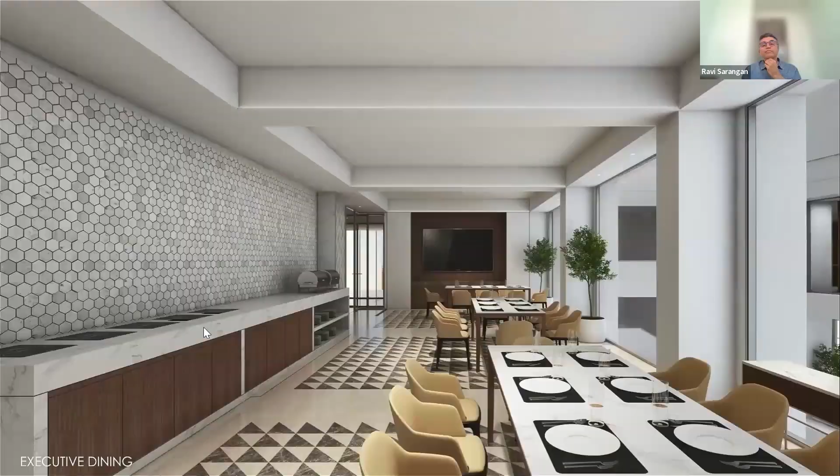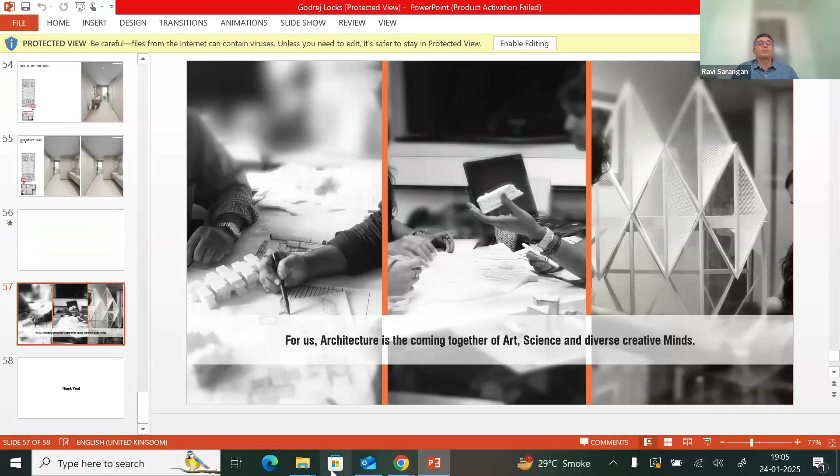So yeah, I'm through with my presentation. Thank you very much. For us, architecture is coming together of art, science, and diverse creative minds. And that's about it, so I'm through with my presentation. I've kept it short and sweet.